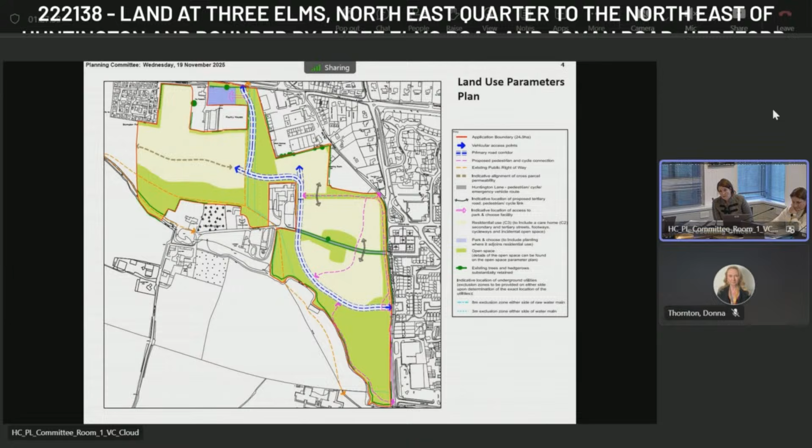The predominant land uses are for residential, a park and choose, and land will be set aside for a care home. I stress residential development is not proposed within the flood zones. Next slide, please.

This is the green parameters plan. With respect to trees, policy LD1 requires development to maintain and extend tree cover where important to amenity through the retention of important trees, appropriate replacement of trees lost through development, and new planting to support green infrastructure.

Specifically in relation to green infrastructure, policy LD3 states that development should protect, manage and plan for the preservation of existing and delivery of new green infrastructure. For existing green infrastructure, this includes the protection of hedgerows. Green space as part of this development is set out in the parameters plan to visually and physically assimilate the development into the existing context.

Open space is shown on this plan in green, and play areas, albeit indicative, are shown by the pinky coloured stars. Another key feature is the enhanced buffer zones. As you will see, landscape buffers next to Bovington Park, and the green areas also include flood storage and open space along the Yazor Brook to create a linear green corridor. An open space buffer is also shown around Huntington, and this is to respect its setting, and a linear buffer is proposed along Three Elms. Also, a number of existing trees and hedgerows will be retained.

The proposal has been accompanied by a detailed LVIA, and any landscape concerns can be addressed at the reserved matters stage detailed design. However, members are reminded that the landscape officer has not objected to the proposal. As such, after considerable analysis of the submission, including extensive review of the LVIA, the visual impacts of this scheme are not deemed significant. Future reserved matters will ensure landscape considerations are taken into account for the scheme, and as this is an outline stage, the landscape is considered acceptable. Next slide, please.

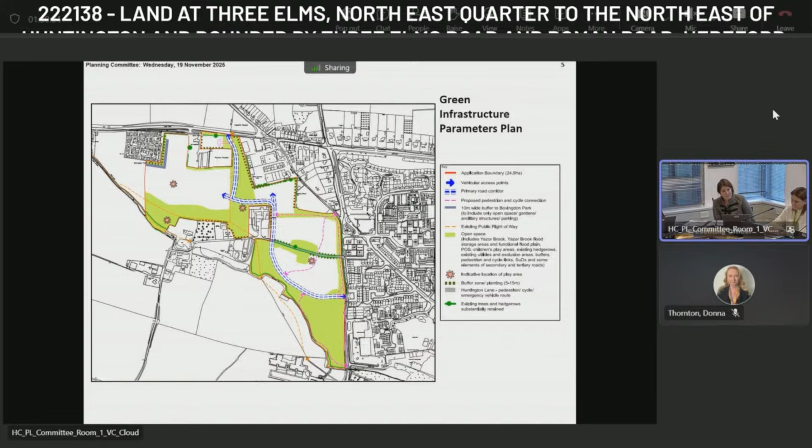This is the final parameters plan in the form of accesses, which leads onto discussions relating to access and highways. The proposed access points and the main internal vehicle circulation routes associated with the development are shown on this plan. This plan again shows the proposed location of the park and choose as well as the public rights of way. The site will be accessed from 2 new vehicular access points, one along Roman Road to the north and one to the south along Three Elms Road. The internal road layout would be secured in any future reserved matters application.

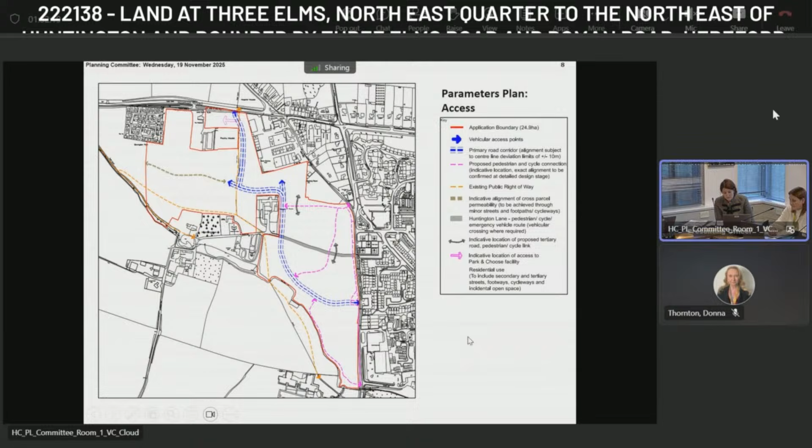The addition of this mini roundabout now creates a deliverable scheme focusing on safe, active travel provision and has evolved following extensive discussions with the local highway authority and the applicant, as the initial junction was considered substandard for pedestrian cycle desire lines and did not fully meet the sustainable travel hierarchy. As members will be aware, both national and local policy aims to reduce car dependency as well as promoting walking, cycling and public transport, and this has been a key consideration, and your officers have secured improvements to the original submission in this regard.

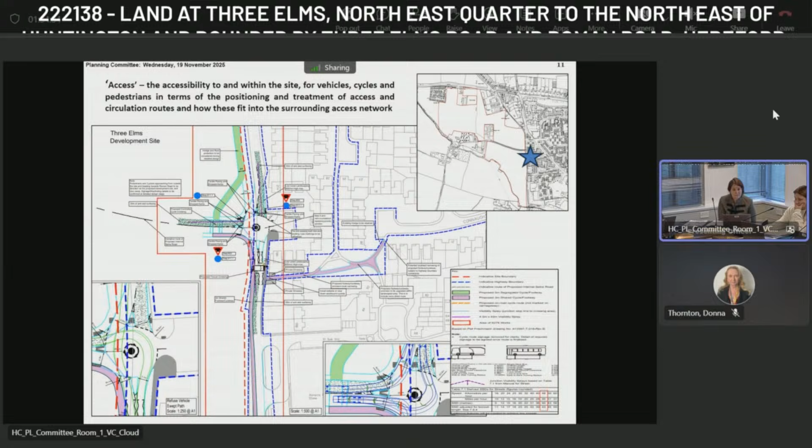With respect to flood risk, the majority of the site is located within flood zone 1, low risk. The site is divided by the Yazor Brook, which crosses the site from the northwest corner towards Three Elms Road to the east. The land immediately to the south and north of the brook is identified as flood zone 3, high risk, and flood zone 2, which is medium risk.

As discussed yesterday and referenced earlier, no residential development will be located within flood zones 2 or 3. Residential development will be solely within flood zone 1. Open space and green infrastructure will be in the flood zones 2 and 3. This slide shows the EA flood mapping.

Officers are very aware, both from representation received from local parishes and local residents, drainage is a concern. Drainage and floodwater management has been a key consideration for this application. The application has been supported by technical flood risk assessment and supplementary drainage reports, as well as details on drainage strategy and modelling.

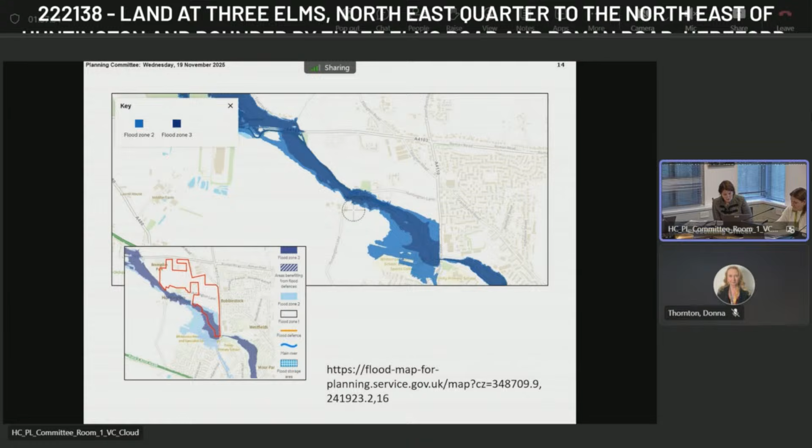This mitigation includes the raising of property thresholds in areas of concern, and again this can be addressed at reserved matters stage. This also includes, for example, the proposed development south of Huntington Lane, which needs to consider the ongoing risk of surface water spilling from Three Elms Road to the Yazor Brook, as well as provision needs to be made in the master plan for a drainage feature that may intercept runoff from the industrial estate. Again, this is deemed to be considered at reserved matters stage. I also draw your attention that Welsh Water have also not objected. Next slide, please.

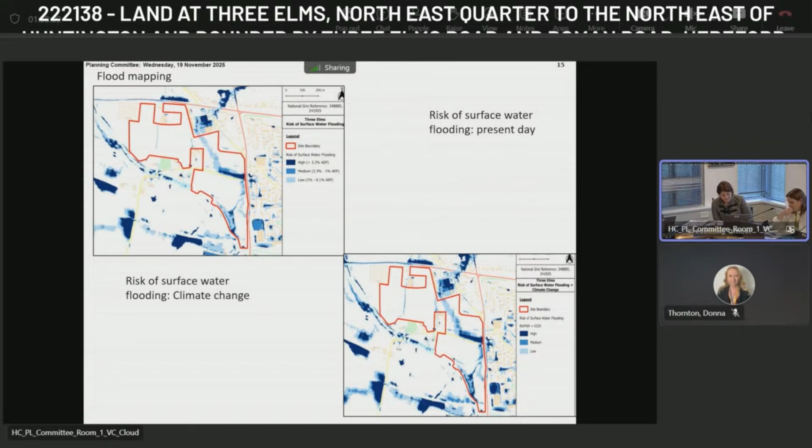This slide shows data informing the submission relating to surface water flooding, both for present day and climate change event. Officers within the committee report have also referenced that the sequential test is not required on the basis of NPPF paragraph 180. The 2020 flood risk assessment relates to the council's local plan supporting evidence, and this is not a site-specific FRA, and as such this application does not require a sequential test on the basis of paragraph 180. Next slide, please.

Concerns have been raised around water in the aquifer and that the development could compromise the purity of water. This application also assesses the impact of the development on water quality. Officers acknowledge that a tailored approach to address unacceptable risks, including that of water environment and the water supply borehole receptors, should be carried out in the form of submission of site investigation reports identifying remedial works and mitigation methods. Within paragraph 9.193 of the committee report, there is a reference to a borehole condition to address the private water supply.

However, your officers are aware within the suite of conditions at the end of the report, this bespoke condition has been missed off. Your officers will ensure this is included, and can I draw attention to the proposed wording on the slide relating to this matter. Also, officers have secured via the Section 106 an information pack to residents explaining how the open space will be managed and the appropriate use of household chemicals and fertilisers due to the importance of this underlying aquifer.

Finally, can I draw your attention to the correspondence received overnight from Heineken's legal team in which they have confirmed the withdrawal of their objection relating to water supply. Next slide, please.

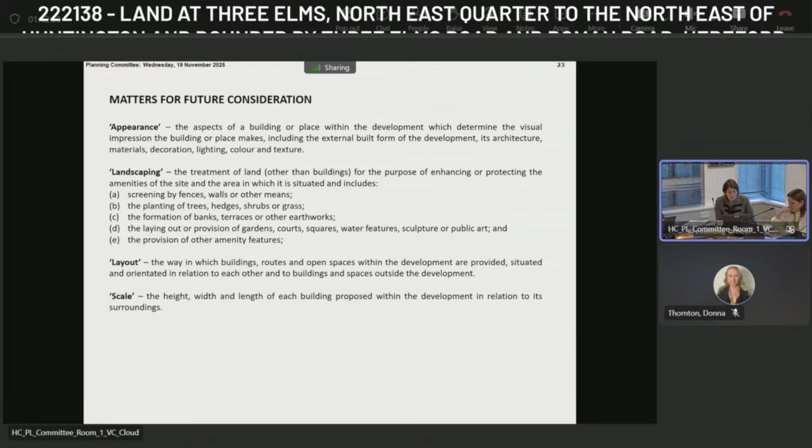A Section 106 agreement is required to secure the necessary planning contributions generated through the scheme and the delivery of affordable housing. The agreement has progressed significantly between the applicant and the council, and a draft heads of terms as detailed within this committee report will form the basis of a legal agreement. Next slide, please. Details relating to scale, layout, appearance and landscaping would be provided for approval at the next stage, reserved matters stage, and I stress are not under consideration with this application. Next slide, please.

As discussed yesterday on site, your officers have worked extensively with consultees and statutory consultees to secure improvements and changes during the assessment of this application, to enable this application to be brought in front of you this morning with a favourable recommendation. Whilst in an ideal world this strategic allocation would be presented to you in its entirety, this is not the case. However, this application plays a significant role in delivery of part of the allocated site known as Three Elms Strategic Allocation Policy HD5 within the current core strategy, and delivering this site will give substantial benefits, including addressing the need for housing, including affordable housing, within the allocated plan period up to 2031 by providing up to 350 homes on part of an allocated site.

Also generating economic benefits through on-site employment during the construction phases, and also providing infrastructure for the wider allocation as well as a park and choose. In environmental terms, the scheme offers the ability to mitigate flooding locally and also offers improved access to public transport and opportunities for cycling and walking for prospective inhabitants as well as the wider population. However, it is not surprising that a development proposal of this scale raises various issues and concerns, leading to potential tensions and conflicts with other policy interests.

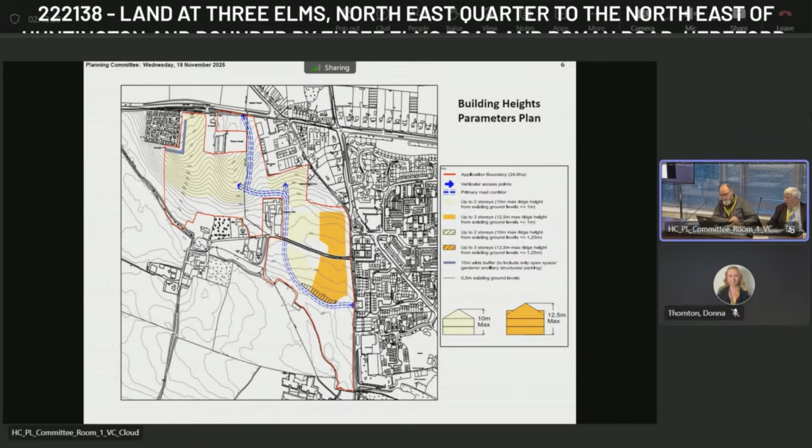Councillor Taylor. Thank you, Chair. Please bear with me. I am a bit new to doing this and I'm a little bit confused. So are we actually looking at just outline planning today? Yeah. And just looking at the actual access? Outline planning and the access. We're not looking at anything else. And the access, that's it. Yeah. Just to say, this is where we can actually put these houses.

Are we looking at whether it's actually safe to put these houses here? The detail of the positioning, other than not in the floodplain. Okay. That will follow at a further application. Okay. So could I suggest then... So I am getting conflicting sort of information here. I'm getting a little bit confused.

I am sorry, but could I say that I really do have real serious concerns about this application. The sheer number of objections with this application. I understand this is mainly about the flooding and this is about the aquifer, but you're saying today that we're not actually looking at that, correct? I'll hand it over to Ms. Gibbons. Okay, let's clarify. So this application's made in outline.

So what we're looking at is: is the principle of development acceptable on this site? We are looking at what the constraints are. So you've got a really detailed report in front of you that identifies all the constraints of how this site might be delivered. You have also got the details of how this site would be accessed at the 2 points on Roman Road and on Three Elms Road. So what you're not looking at is the detail.

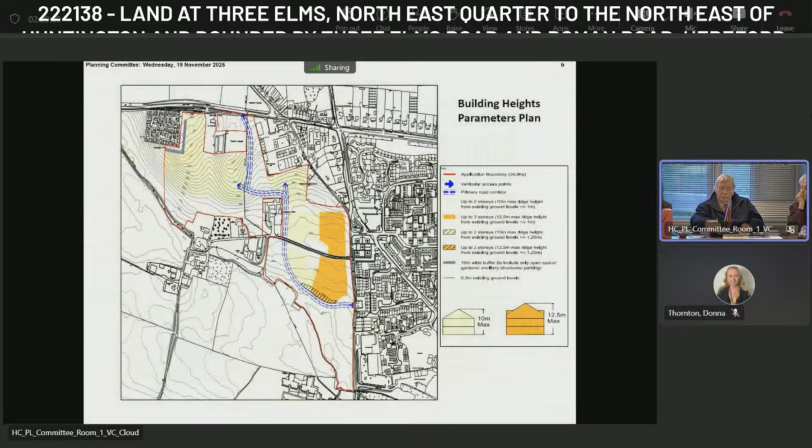Okay, so I think this is something we'll probably manage between myself and the local highway authority. But just to put on the screen there, the access point to the north onto Roman Road. So can I hand over to you to just talk through that element? Thank you, Katie.

Hi, yeah. This access has been subject to extensive technical reviews, both in terms of an engineering element and also the capacity elements, looking at the flows on Roman Road and also the junction modelling, and we have concluded that it's an acceptable form of junction. We welcome further clarification as to what actually the main issue is with this junction, because from a technical point of view and also from a junction modelling point of view, we've concluded that it's suitable.

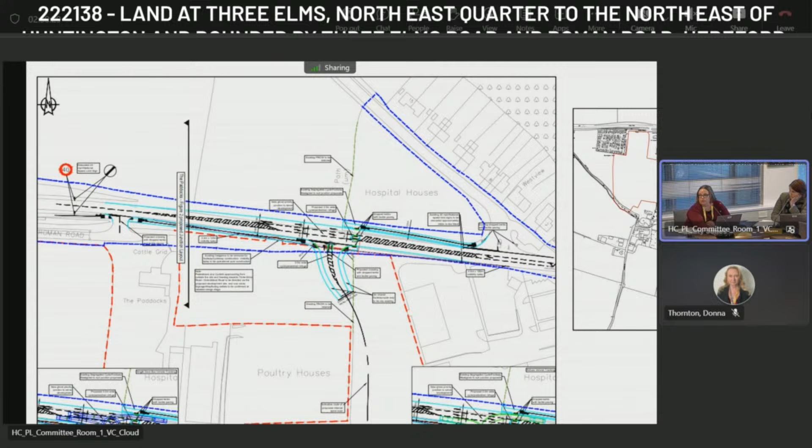Sorry, is it worth just pointing out that it's a right-hand turn lane, isn't it? There's a lane. Yes, it's a priority junction with a ghost right turn lane, so traffic wouldn't have to sit on the Roman Road in order to turn right into the site and hold up traffic.

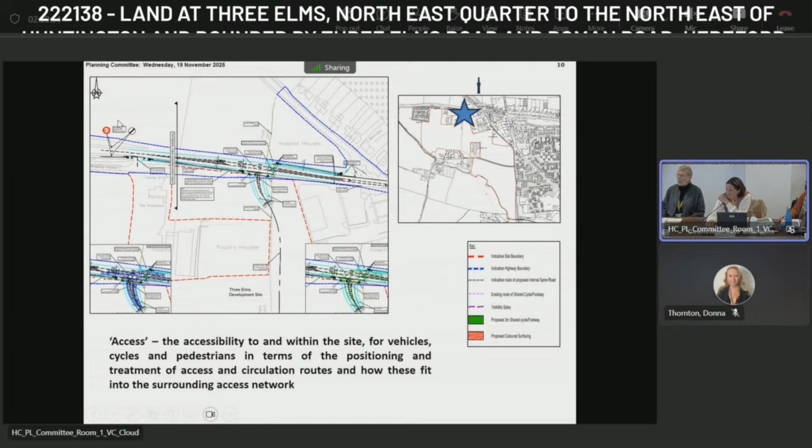Can I just double check? Because I think Councillor Crockett, as the adjoining ward member, referenced the speed along there being 60. I think you're proposing to drop it to 40 further back, aren't you? And I'm assuming you're effectively narrowing the carriageway to fit in that right-hand turn, or that will give the perception of the highway narrowing. Is that not correct?

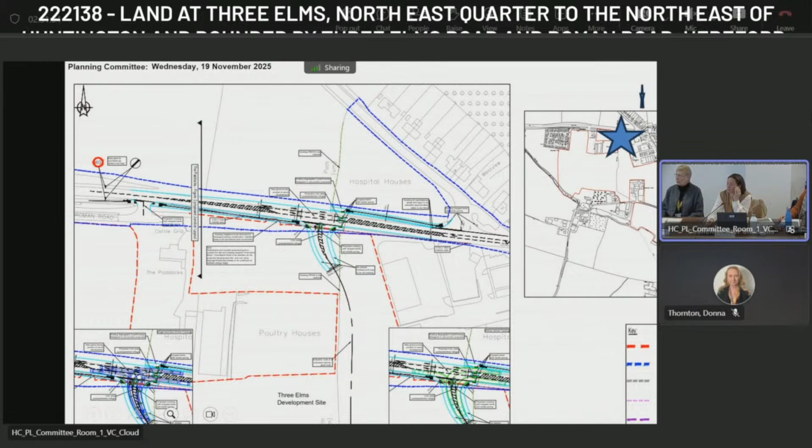To confirm whether there's actual narrowing, I'll have to check on that. But yes, the overall effect will appear to be a narrowing. Whether there's actually a physical narrowing, I'll have to double check. But the fact that there are a lot more features at the junction, it will naturally slow traffic anyway, as well as the 40-mile-an-hour limit. But in order to physically check whether there's a narrowing, I'll check. Yeah, we'll just deal with that. I think it's important.

Right. Councillor Gennard? Thank you. Many thanks to Heather for her report, as people have said, and our site visit yesterday. My issues come with the environmental impact of this proposal. I feel that the complex geography was not actually clear when the site selection was made for our core strategy. So the policy HD5 that covers this western urban expansion actually doesn't mention an aquifer.

However, within the core strategy, there are other locations that mention aquifers. So in those cases, I'm assuming that they were known and obvious. So an assumption on my behalf that the aquifer within this area was not known before it was chosen for an expansion area. So policy SD1 calls to ensure new development does not contribute to or cause groundwater pollution. Policy SD3, sustainable water management and water resources, point 9, development should not cause an unacceptable risk to the availability or quality of water resources.

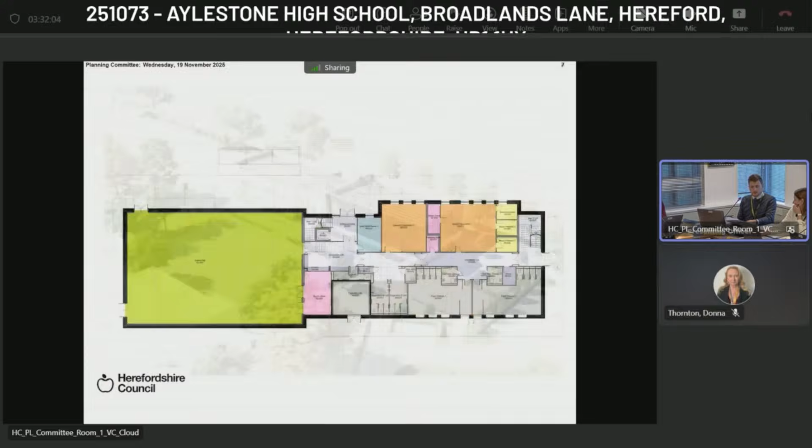In between the building and the car park, you can make out that sort of outdoor classroom that we saw yesterday, so that would remain as is. Next slide, please. Yeah, so as mentioned at the start, this is the ground floor plan.

So it includes sports hall, then you've got 2 classrooms, including one to principally be dedicated for music, with some separate breakout rooms as well, but also changing rooms and other ancillary spaces, storage areas, serving a variety of uses. First floor is next slide. So again, further classrooms, other rooms for staff, storage, etc.

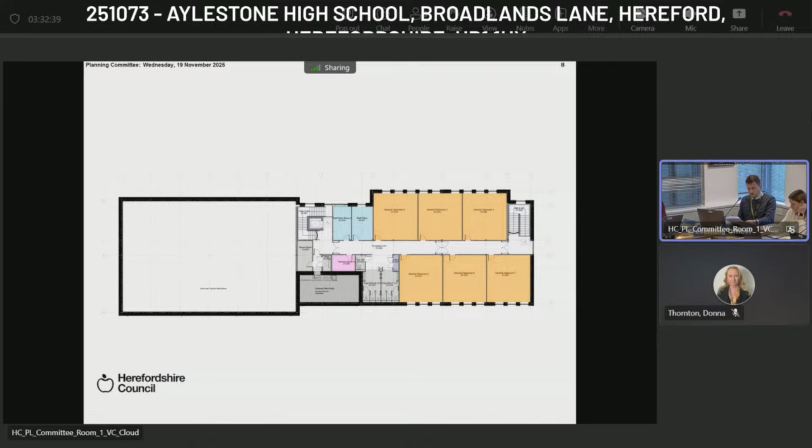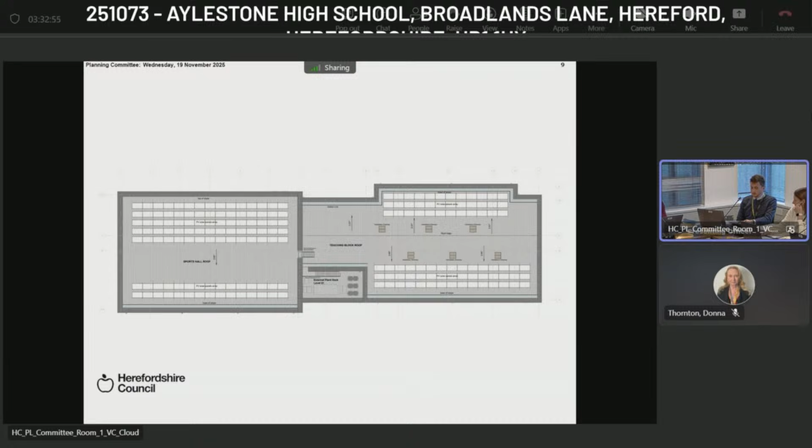And then the next slide shows the proposed roof plan. It's fairly standard with some PV panels, plant equipment as well. Next slide. So again, this is one of the detailed landscaping plans, but it shows this part of the site in more detail.

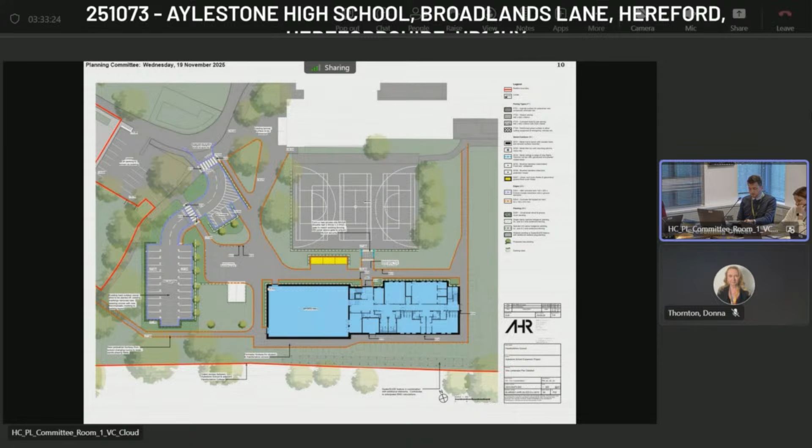And again, the proposed hard standings and footway links to be provided, cycle storage to the immediate north in yellow, and then again the car parking, making use of the existing multi-use games area. Next slide, please.

So I guess an important element of the scheme is the changes to the existing access loop, which enters the site from Broadlands Lane. So members that attended the site visit yesterday, we entered from the principal access off Broadlands Lane and walked past the Grade 2 listed Aylestone School building. As set out in the report, there are existing highways issues on Broadlands Lane, which are ultimately exacerbated by a lack of coherent flow into and through the site for parking and drop-off and

pickups, etc. Discussions have taken place between ourselves and the local highway authority and the applicant to reach a solution, which you can see on the plan, which basically makes alterations to that loop to accommodate further parking spaces, drop-off and waiting bays, and bus, coach, pickup and drop-off bays. So that would be an inherent part of the scheme to address the existing issue, but also to accommodate the uplift that would come forward given the increased capacity of the school.

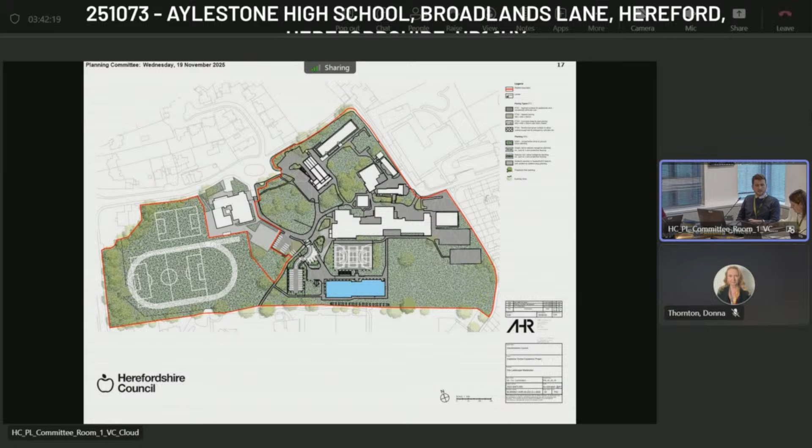Members would have picked up yesterday there were people parking on grassed areas. That's simply due to a lack of parking and a contrived internal layout, which just exacerbates those existing issues that are experienced on Broadlands Lane. I think the next slide actually has the parking changes. So we've got the loop actually first. So that's just in terms of what I've spoken about.

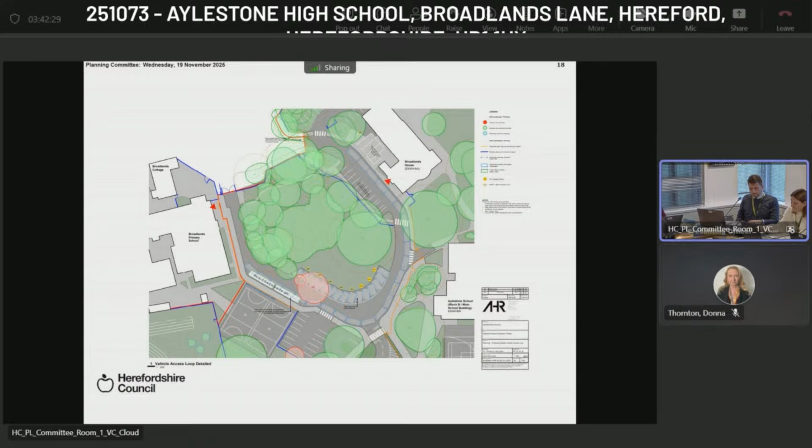The proposal increases on-site parking. I think the next slide, there we go. Increases the on-site parking, including accessible and visitor spaces, and improves cycle and pedestrian routes through the school as well. So this shows the difference. There's an uplift of 20 spaces, but also an additional 60 cycle spaces. There's currently quite a deficit of cycling provision, whereas the proposal would look to demonstrably increase that provision.

Linked to that, there's a travel plan, and a robust travel plan would be required to be updated as secured by condition, and that would include a steering group and measures to promote sustainable travel. So that goes hand in hand with the changes that have been sought by the local highway authority in terms of increasing the number of cycle parking spaces as well. So in essence, the local highway authority raised no objection and considered the revised scheme to provide tangible improvements to access, circulation and safety. And that's been an iterative process since the application was submitted in March.

I think it's worth mentioning there have been discussions surrounding the Safe Routes to School initiative. I know that was picked up on the site visit yesterday. That's currently in a trial phase. It was launched, I believe, at the start of November. And ultimately, as the name suggests, it's looking at what works and what doesn't. There may be aspirations for the council to roll that out on a permanent basis, but the issue is that we can't rely on that at this stage as a permanent solution, because there's just no certainty that it will come forward to prevent traffic from entering Broadlands Lane. And that's why we've worked with the applicant's team to reach this solution in terms of the revisions to the loop and the additional parking as well.

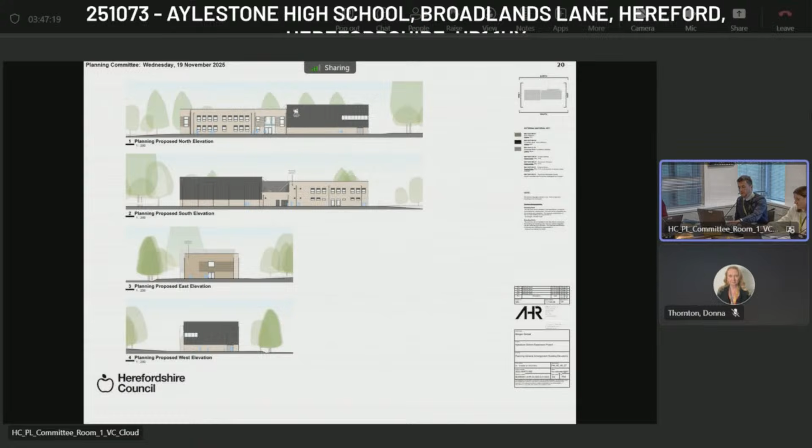Thank you, Mr. Jones. And now can I ask Mr. Hancorn to speak in objection to the proposal?

Chair, members, we all want better schools and better trust in local services, but this proposal does not meet the test of fair process or genuine public need. Herefordshire Council is both the applicant and the decision maker. It is using the PSI fast-track route intended for urgent public facilities. This location is also the predetermined option, not the result of any objective site assessment or educational justification.

Cabinet approved the principle in February 23, and FOI shows officers describing it as the start of a potential new school, extending outward from this building and further encroaching upon playing field land. Over 2 years later, that longer-term agenda was never shared transparently with the public, yet the Council now claims that this is an urgent PSI project.

Sport England's statutory objection remains live. This application fails the exception test that engages the 2021 consultation direction. If members are minded to approve, it must be referred to the Secretary of State before any permission can be issued, yet the report still asks you to grant permission. That cannot be right when a statutory objection stands.

There is no consultee response from education, no statement of need, no demand data, even though the PSI justification rests entirely on educational necessity. At the same time, the Council's own figures show declining secondary numbers. How can members give significant public benefit weight when this need is unproven and when October DfE data show outcomes deteriorating, not improving? It is difficult to see why a 13 million PSI fast track has been pursued in these circumstances.

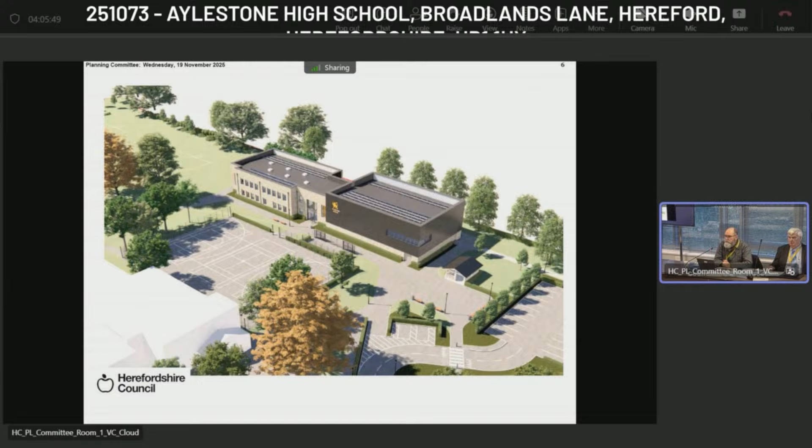Councillor Stone. Thank you, Mr. Chairman. I'm very sorry I missed the site visit yesterday to Aylestone.

As you rightly say, Chairman, schools do ebb and flow over the years, as I've known in my own past career. It's always regrettable to lose any playing fields, even if it was an underused area. But on the other hand, there's going to be the new sports hall, which means that more sports overall will be played. So there'll be no loss of sports provision for Aylestone.

And also there will be community access outside school hours, which I think will benefit quite a lot of people in the local community. I also welcome the extra parking, which will be useful, and at the same time the improved cycle storage and the work that's carrying on with the safer routes to schools. And let's hope that will come up with some more positive suggestions too.

So with the modern sports facility, more classrooms, more provision for music, and other parts of the curriculum as well, I think overall this is a good scheme which deserves our support this morning. Thank you very much, Chairman.

Thank you, Councillor Stone. Are there any other speakers? Councillor Simmons? Other than to suggest that we accept this officer recommendation. Okay. So is there a proposer and seconder then, please? On that side. Right. Second. Yeah. Councillor Thomas is second. Councillor Thomas seconds. Okay. Those in favour, please show. Okay, that's passed then.

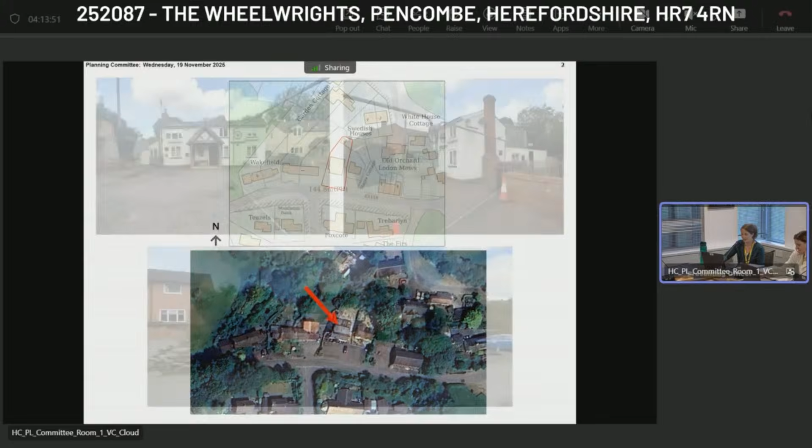Next slide, please. This slide shows photographs of the site, with the top left looking from the C road to the north, the bottom image showing a similar but wider view, and the top right showing the west elevation. The building is a modest 2-storey structure with rendered walls, stone and red brick chimneys and a slate roof reflective of the local and traditional vernacular. Due to the building's age, design and continuous community use as a public house, the building is considered to be of local heritage value. As can be seen in the photographs, the building is set back from the road with an area of hard standing to the front, which is included in the application site.

Next slide, please. This slide shows further images of the site and surroundings, with the top left showing the property to the west of the site known as Number 1 Wakefield, and the top right shows the property to the east known as Staple Cottage. The bottom image shows the west elevation of the existing public house, including the side and rear extensions and the rear garden area. Next slide. These photographs show the existing bar area and the commercial kitchen on the ground floor.

Next slide. The drawing on the left of the slide shows the existing ground floor plan, including the bar, kitchen, stores and toilets, and the right shows the proposed ground floor plan, which shows that the existing internal layout would remain the same, with the only alteration being the removal of the bar area and seating and infill of a partition between the proposed living room and the dining room. To the front of the property, 4 parking spaces are identified within the area of existing hard standing. Next slide.

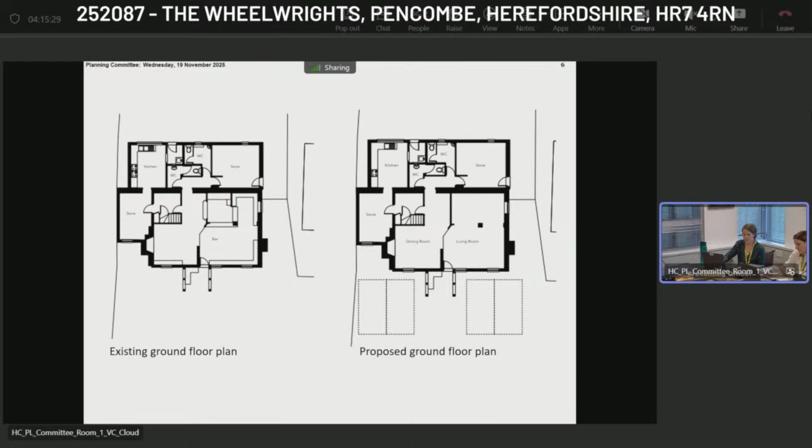The drawing on the left of this slide shows the existing first floor plan, which provides 2-bedroom managers accommodation currently. The proposed first floor plan on the right shows that the existing layout would also remain the same, with the internal works required being limited to the removal of the kitchen units to provide an additional bedroom.

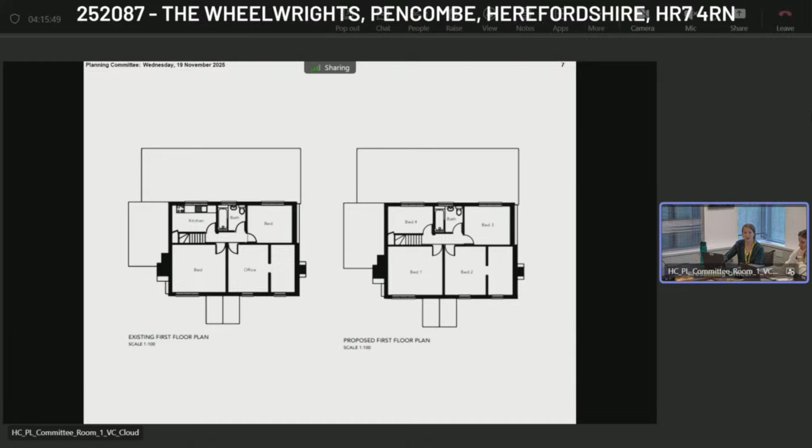Next slide. So the proposal is being assessed against the relevant policies of the Herefordshire Local Plan Core Strategy and the National Planning Policy Framework. There's no neighbourhood plan for the area. The proposal is considered to be acceptable in respect of its locational sustainability for residential development, its design and impact on the character of the site and non-designated heritage asset, residential amenity, drainage and flood risk, ecology, highway safety and parking. However, the change of use of the public house would result in the loss of a valued community facility.

Based on the information available and as set out in the officer report, it's considered that insufficient evidence has been provided to demonstrate that there is an appropriate alternative facility available, that the facility is no longer required, viable or fit for purpose, and that adequate marketing is being carried out at a realistic price. As such, the proposal is considered to be contrary to policy SC1 and RA6 of the Herefordshire Core Strategy and paragraphs 88, 96 and 98 of the NPPF. It's therefore recommended that the application is refused.

Thank you. And now I'll invite Mr. Burge to speak on behalf of Pencombe Group Parish Council. You have 3 minutes. Hi. So my name is Tim Burge. I'm the Vice Chairman of Pencombe Parish Council. So here on behalf of the parish residents, and we wish to strongly object to the planning application.